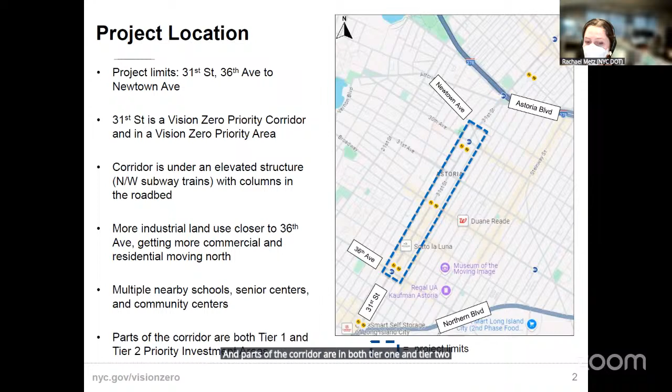So there's been a lot of work happening in this area over the last number of years that we wanted to mention. In 2017, concrete bus bulbs were added on 31st Street at 39th Avenue, 36th Avenue, and Broadway.

In early 2020, there was a public workshop about expanding the Astoria bike network and the proposed protected bike lanes on 31st Street in each direction as an option, in addition to Crescent Street, which was implemented later that year and into the following year.

In September 2023, there was a public workshop about the bike network and public realm planning for 31st Ave. And in summer and fall 2024, daylighting treatments were installed on Broadway from 21st Street to Steinway.

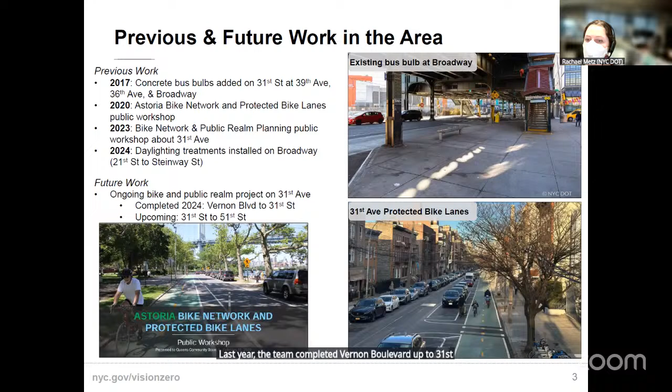In terms of future work, there's an ongoing bike and public realm project on 31st Ave with a bike boulevard and public realm improvements. You can see in the bottom right-hand photo, the protected bike lanes on 31st Ave. Last year, the team completed Vernon Boulevard up to 31st Street, and the upcoming portion is 31st Street to 51st Street.

And the Western Queens Street Safety Plan, this was a report published in springtime 2024 by multiple elected officials - Tiffany Caban, Zohran Mamdani, Jessica Gonzalez Rojas, and Kristen Gonzalez. Our safety proposal on 31st Street, along with DOT's Vision Zero work, the expansion of the bike network in Astoria, and previous transit work on the corridor, align with the 7 goals outlined in this report.

I listed them here, I'm just going to read through them. The goals are to improve bike infrastructure and design, to improve pedestrian infrastructure and design, universal daylighting, reimagine traffic enforcement, slow cars and disincentivize heavy vehicles, make the MTA excellent, reliable, and accessible, and safe and sustainable e-micromobility.

And this report also requests a north to south bike connection and identifies 31st Street as a potential corridor through the neighborhood.

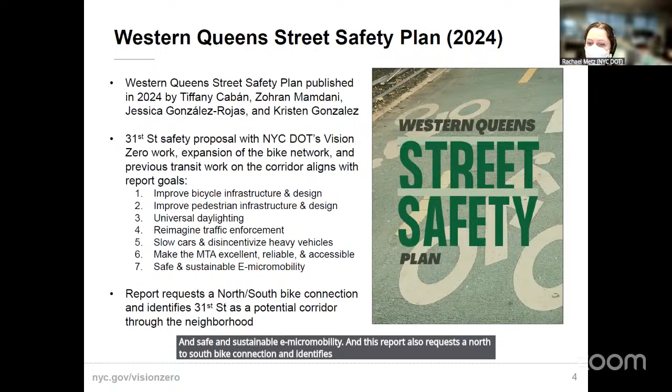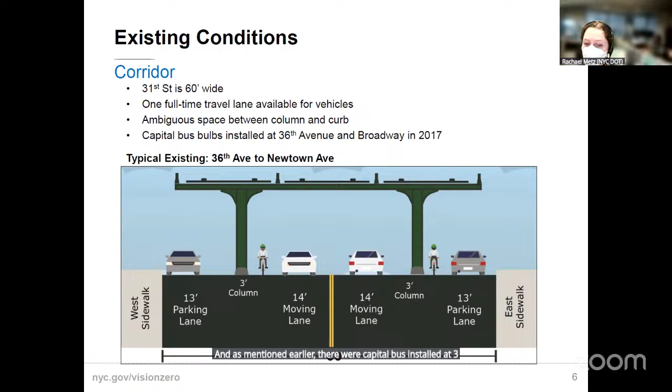So if we're looking at what 31st Street looks like now, here's a cross section of the existing conditions. It's a pretty wide street, 60 feet wide. There is one full-time travel lane in each direction available for vehicles. There's this ambiguous space between the column and the curb, which you can see on the right-hand side - the cyclist is biking next to a parked car. As mentioned earlier, there were capital bus bulbs installed at 36th Avenue and Broadway in 2017.

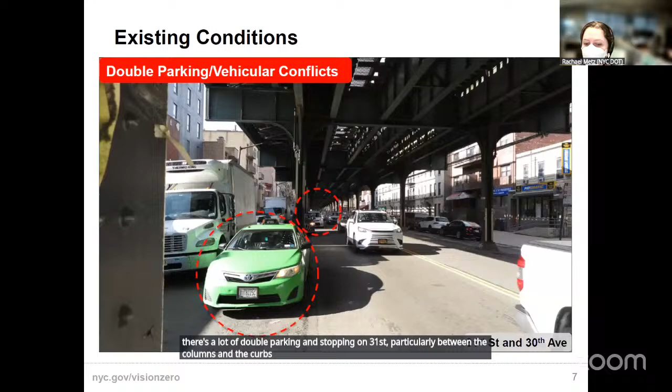This double parking can lead to unpredictable vehicle movements. When vehicles are stopping in this ambiguous space between the column and the curb, and then driving out into the travel lane, that makes it unpredictable for everyone using the road—other drivers, as well as pedestrians and cyclists.

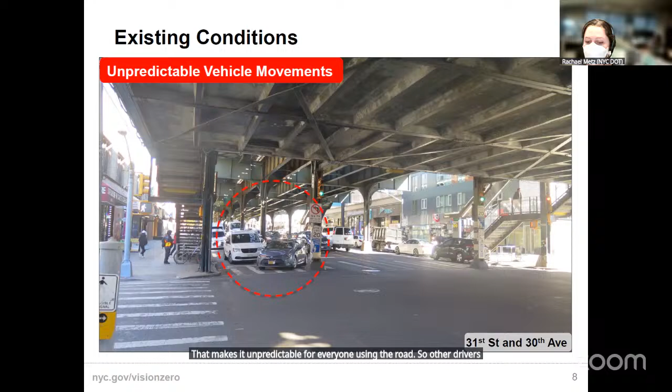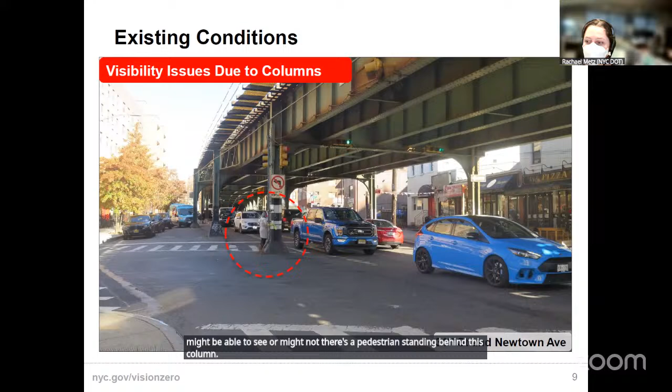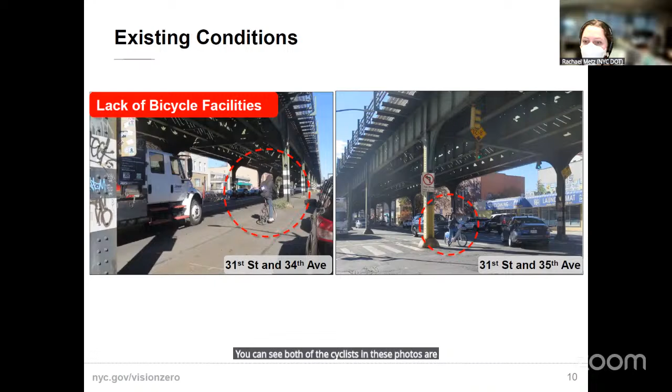And there are long pedestrian crossing distances. As mentioned, it's 60 feet wide, which is a long way to cross, but especially if you're, just like in this photo, pushing a stroller or might have limited mobility.

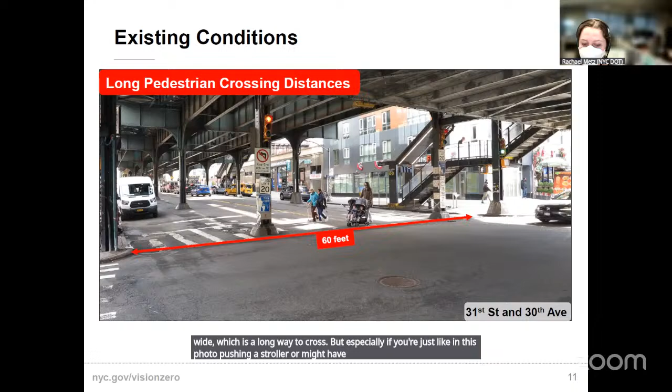The first is to move the curbside parking adjacent to the columns, kind of in line with the columns, to define this space between the columns and the curb.

Next is to install protected bike lanes on the curb in the northbound and southbound directions, as seen in the green in the bottom. Next is to install painted pedestrian refuge islands at the intersections where feasible to shorten crossing distances and improve pedestrian visibility, which we'll see on the aerials in a few slides.

Install vertical elements to encourage vehicles to make slower and safer turns and to yield to pedestrians and cyclists. And then one extra element is that we'll be resurfacing this corridor this summer before implementing the proposal.

So how does this fit into the Astoria Bike Network? This proposal will provide an important north-south bike connection to existing bike infrastructure in Astoria, with connections to 36th Ave, 34th Ave, and 31st Ave bike lanes.

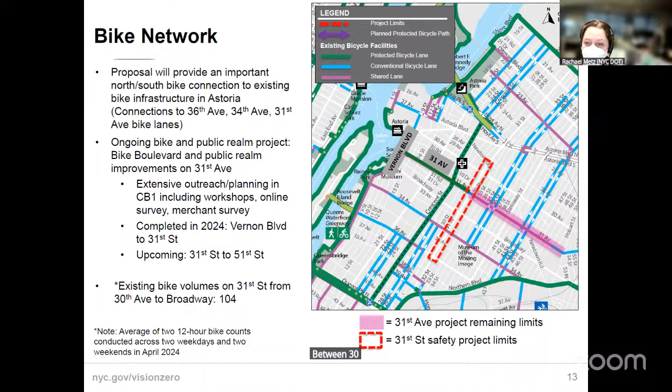We also wanted to touch on protected bike lane safety. In 2022, DOT released a report called Pedestrian Safety and Older New Yorkers, and this study analyzed the impact of protected bike lanes on safety for roadway users.

It showed that protected bike lane designs are proven to calm traffic and improve safety for all roadway users—pedestrians, cyclists, motor vehicle users. It also found that safety improvements associated with protected bike lanes are the most impactful for the most vulnerable roadway users.

If we look just at pedestrians, that's nearly an 18% overall injury reduction and nearly a 30% severe injury reduction. And if we look at just senior pedestrians, some of our most vulnerable street users, there was a 22% injury reduction and nearly a 40% severe injury reduction.

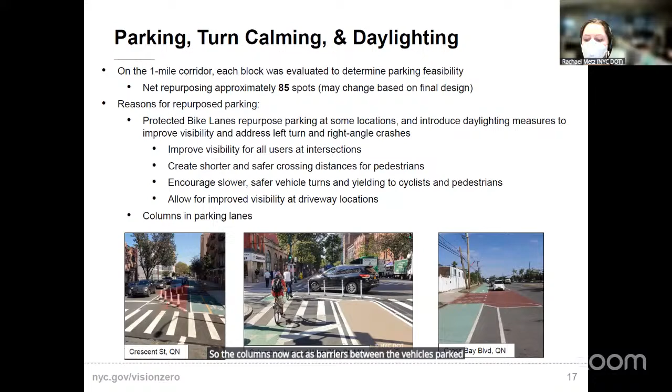Additionally, some parking is repurposed due to the location of the columns in the road. The columns currently are in this ambiguous space that we discussed, and they obviously cannot be moved. So when we add the floating parking next to the protected bike lane, vehicles are now adjacent to, in line with the columns, as opposed to between the column and the curb. The columns now act as barriers between the vehicles parked there, which causes some spots to be repurposed on each block.

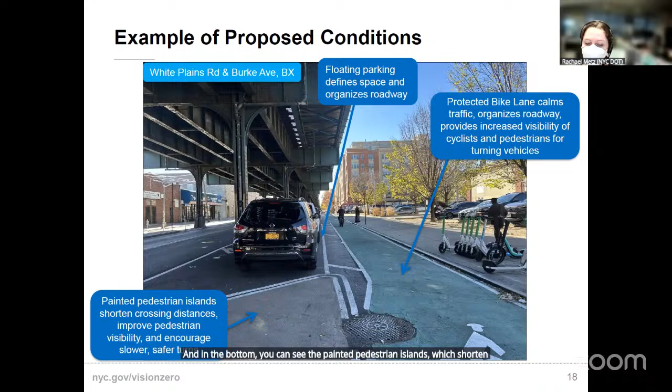Here's an example of proposed conditions on one of our projects on White Plains Road and Burke Ave in the Bronx. You can see on the right-hand side the green protected bike lane, which calms traffic, organizes the roadway, and provides increased visibility of cyclists and pedestrians for turning vehicles. Next to it, you can see the parked cars in the floating parking, which defines the space and organizes the roadway. At the bottom, you can see the painted pedestrian islands, which shorten crossing distances, improve pedestrian visibility, and encourage slower and safer turns.

Overall, these project benefits organize the roadway and clarify vehicle movements underneath the elevated subway. The proposal provides slower and safer turns, reduces conflicts, and improves visibility among drivers, cyclists, and pedestrians. It reduces speeding and vehicle conflicts on 31st Street and increases pedestrian visibility and safety. The protected bike lane calms traffic, shortens pedestrian crossing distances, and organizes the roadway, providing safety for all roadway users, and provides safer and more convenient bicycle travel, expanding the protected bike lane network in Queens.

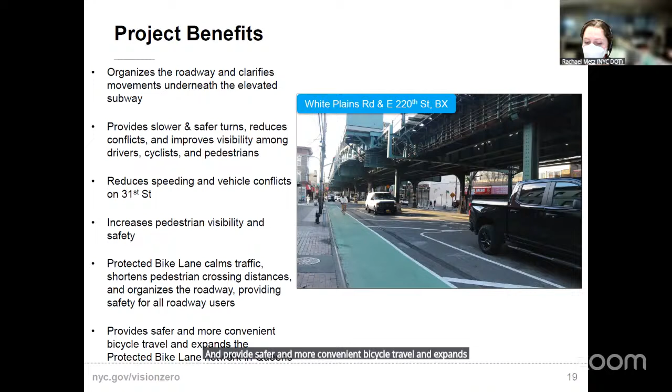Hello, this is Dominic. Put up your hand if you have questions to ask committee members.

Rachael, that is an amazing presentation, thanks so much. That's an amazing presentation, Bobby. Thank you, yeah, I second that. That was a great presentation, and also great to see the conditions in very similar places on White Plains Road. It's helpful.

I was curious if any of the bike lane stretches would be getting physical hardening or protections along the corridor, or if the entire bike lane is going to be curbside, obviously with exceptions for spots around fire department connections and things like that.

For parking protected bike lanes, we typically start off with just the painted barrier, the buffer. We don't usually put physical barriers in between the parallel parked cars and the bike lane. However, if we had issues with double parking or consistent intrusions into the bike lane, we would explore that. But we typically use the parked cars as the physical barrier between the travel lane and the cyclists. Okay, thank you.

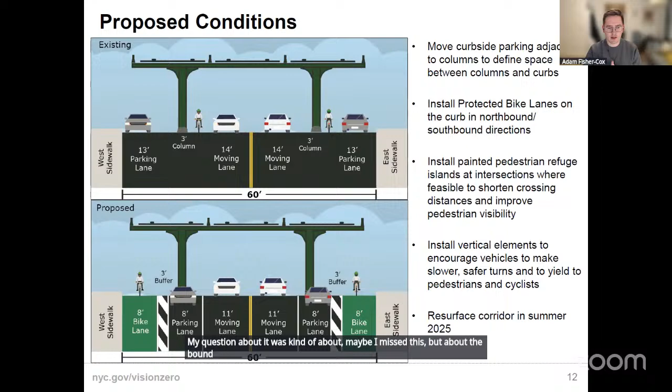Thanks. I just want to echo again, this is going to be a great change, and going to make this street so much more coherent and easy to follow where people are supposed to be. My question was about the bounds of this project. What's the thought, especially on the southern side - it feels like this would be a great route to get down toward Queens Plaza, but it seems to fall a little short of connecting there. What's the thought on where this ends, north and south?

Yeah, so our focus here is really to kind of frame 31st Ave and then 34th. We're trying to plug into the east-west first, and then look at an expanded scope beyond that in the future. We just felt like we wanted to get the heart of the activity here to lay the foundation for the north-south network.

CB1's getting a lot of resources this year from DOT. We've got 51st, we have this Northern Boulevard project, 31st Ave, 31st Street. Finite resources, so we wanted to focus on the heart of where we could get the most commercial connections east-west, biggest bang for our buck in 2025, and that's what we're focusing on. Gotcha, that makes sense.

I would say, if these bike lanes are going to end at a certain point, a weak point in general of the design of bike lanes in New York that I find is that they sometimes just end and there's not a clear idea of where to go next. So for example, if there's a painted area with an arrow indicating that the protected route is going to turn at some point, or anything like that at both ends of this - at least until hopefully it one day extends - it would be really appreciated.

Okay, it's noted, thank you. Yeah, absolutely. And my other comment was going to be that these painted parking areas and pedestrian islands probably will be used as parking areas if they're not hardened in some way.

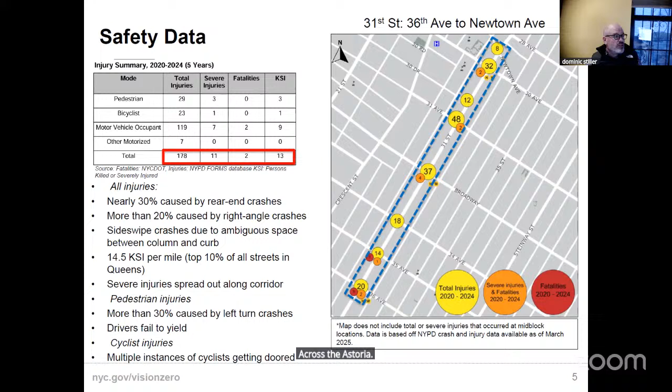Thanks, yeah, I think the update is great. I feel like I've been waiting 30 years for it. It's way better organized now per the plans.

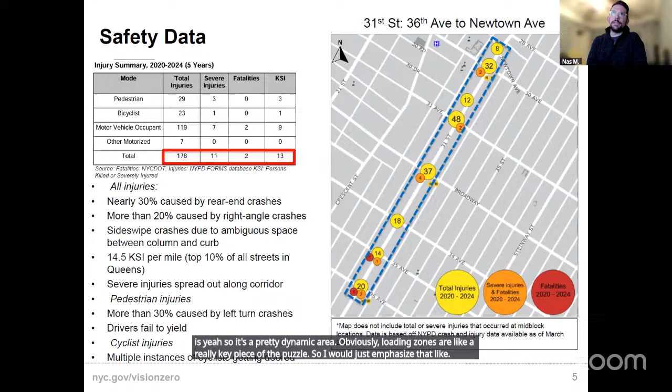Just to add on to Hugh's point, and similar to Elizabeth's point in the chat, it's a pretty dynamic area. Obviously, loading zones are a really key piece of the puzzle. Realistically, there's going to be a ton of commercial drop-offs, which are usually the most disruptive double parking situations, because 53-foot trailers should not be in the city and probably not on this route, and they rarely can get in between the columns, let alone currently curbside, they almost always can't make it.

Just as an example, Euro Markets on 31st Street gets tons of deliveries daily. Those are definitely areas where you'd want to look at having, at least during business hours, commercial only parking. Overnight it can be public parking, otherwise those spaces are just going to become public parking all day, and you don't solve the problem with commercial loading, which is a big issue.

Similarly, realistically a lot of pickups are happening at all the subway stops. I kind of wish this was going all the way north to the Ditmars area, because that area is a super chaotic passenger pickup zone for similar reasons as the rest of the strip. I think the parking unit is really key for this project because of how dynamic the use is, and there's a lot of need for very short-term parking, whether for commercial loading or passenger pickup reasons.

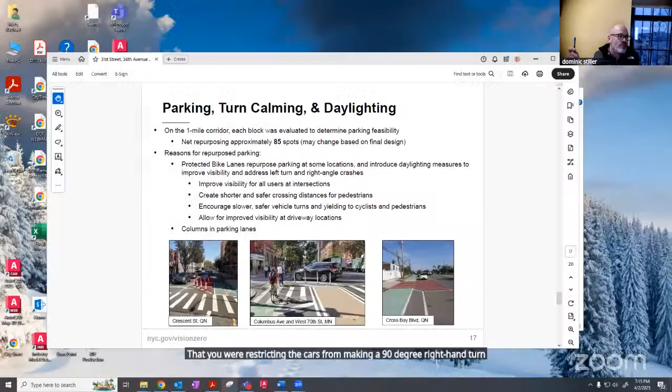I understand, but I want to see how, because what happens a lot is there's painted space, and right-hand turning cars decide which side of the column to go to. From your earlier drawing, which I'd like you to put back up, I thought you were restricting cars from making a 90-degree right hand turn off of 31st in both directions, but maybe you're not. It'll be painted space.

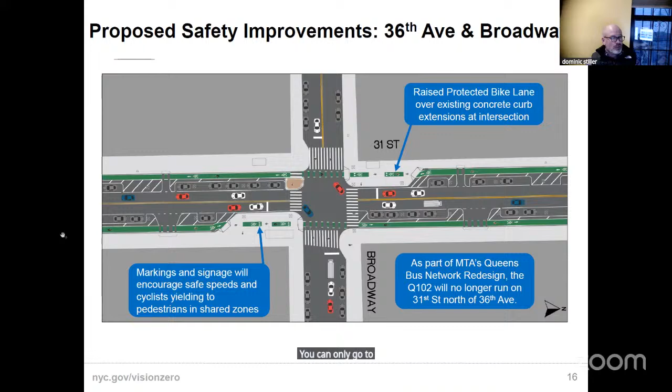So that's the right turn there, north or south off of 31st. In other words, you're on 31st and coming off of it, you can only go to the left of the columns. Yeah, but that's existing concrete. Can you show the other one?

Oh, that's great, there you go. So here you have painted space, painted. Yeah. But it's a shame that you don't have a curb extension to make the right-hand turning cars in both directions have to keep the column on their right.

Those painted spaces could be upgraded to concrete in the future. But what we find, pessimistically, is a poor installation makes a good design bad. Do you know what I mean? People will be running over it, so why wouldn't you consider just concreting that?

When I saw the other layout, I assumed you had new concrete, but now you're saying you've got absolutely no new concrete in the whole design, Chris? Not this year. That's a real shame.

Dominic, I think it's important to remember we always do try to come back to existing painted spaces and try to build them out. That's what we're going to attempt to do this quarter, and what we're doing on Queens Boulevard.

Just south of where this project is, we've already built some new bus boarding islands. I believe it's at 37th Avenue, built last year. Also a little inside baseball on that: we're working with the MTA when we do concrete near MTA facilities, such as the columns, like that island we built at 37th for the bus stop under the El last year.

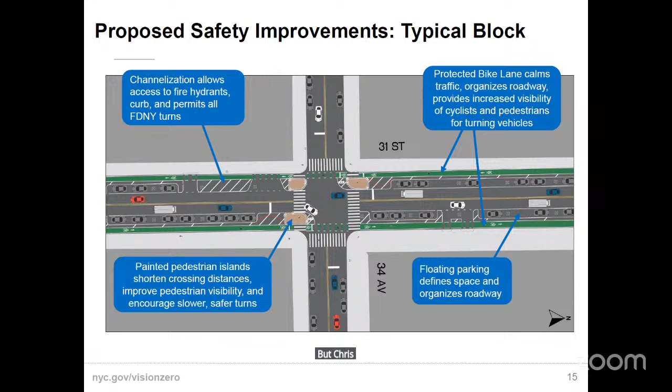But Chris, sorry, I didn't mean to - no, that's all, jump right in. So we're planning to implement this summer. As we had mentioned before, we're planning a resurfacing of this portion of the corridor in conjunction with the project, and that's not eligible until the new fiscal year. So this project can't start until after July.

The resurfacing on 31st Street would be nighttime work, and that allows the work to happen more efficiently. But it takes a few weeks to do a resurfacing, and then after that we usually expect markings of this kind of scope, for about a mile, to take about two months to get completely done. So there's multiple stages of that: the white lines, the green paint, the pedestrian space, the brown paint in the painted spaces, and then the vertical elements of the plastic delineators.

What was the other question? Oh, just the whole design, the whole plan. So the snippets that we show here, we take an AutoCAD drawing - that's a digital drafting software - and we make them pretty for the presentations, and that's pretty time consuming. So we don't do that for the whole design. We take typical intersections such as 34th and 31st here, and then the other ones that have the bus bulbs.

And that's going to be the template for the whole corridor. But the parking loss, the parking repurposing that we present in the plan - that's a very detailed analysis on our end, and we try to be very accurate with that.

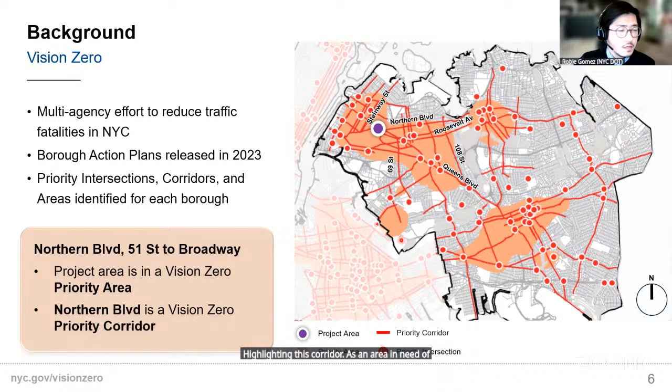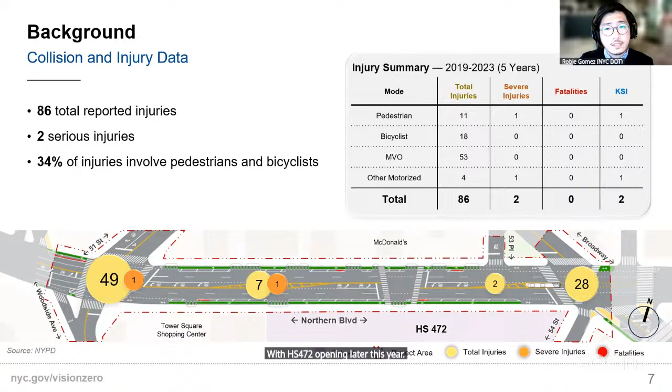In this stretch of Northern Boulevard, there have been a total of 86 reported injuries from 2019 to 2023, including 2 serious injuries. 34% of those injuries involve pedestrians and bicyclists, people who are most vulnerable in traffic. With HS 472 opening later this year, we expect to see more activity in the area, making safety improvements even more relevant.

Now that we've looked at the safety data, let's take a closer look at what the street actually looks like today and what conditions are contributing to these patterns.

This segment of Northern Boulevard is a two-way 70-foot wide street with 2 travel lanes and bike lanes in both directions. Northern Boulevard has numerous curb cuts or driveways along the north curb, which create potential conflict points between pedestrians, cyclists, and turning vehicles.

The existing painted flush median, intended to accommodate left turn bays, creates a wide open field on the roadway. This design unintentionally encourages higher vehicle speeds and gives drivers a false sense of extra space, which can compromise safety.

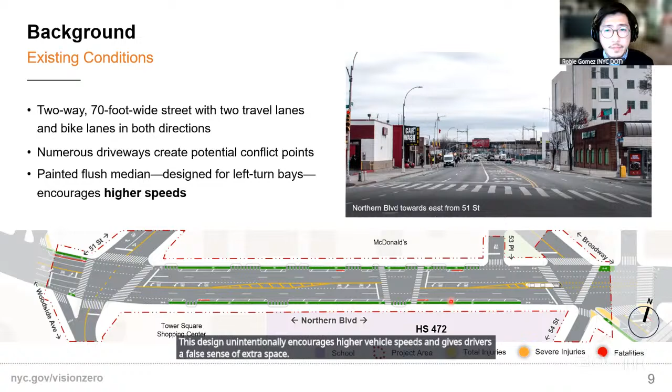Uncontrolled left turns across multiple lanes create safety risks, especially when drivers turning into busy driveways have to cross several lanes, which increases the chances of conflicts with people walking or biking. In these situations, drivers are usually focused on finding a gap in traffic, not looking for people walking along or crossing the sidewalk. That shift in attention increases the likelihood of near misses or crashes involving pedestrians and cyclists.

With more pedestrian activity expected in the area, it's important to address these types of turning movements to support a safer walking environment.

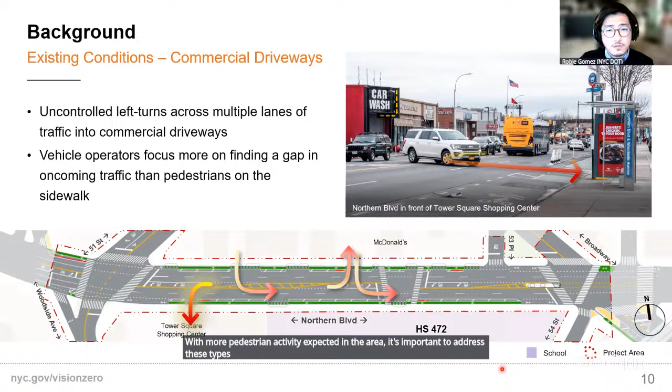It's not just where left turns happen, but how they happen that creates added risk. When drivers make a left turn, they often build up speed over a longer distance, sometimes 30 feet or more, before crossing the sidewalk. This makes it harder for them to stop in time if someone is walking or biking across, which is especially concerning near schools where students may be crossing throughout the day, not just during arrival and dismissal. Right turns, on the other hand, are usually made at slower speeds with a tighter turning radius, giving drivers better visibility of people walking or biking and more time to yield.

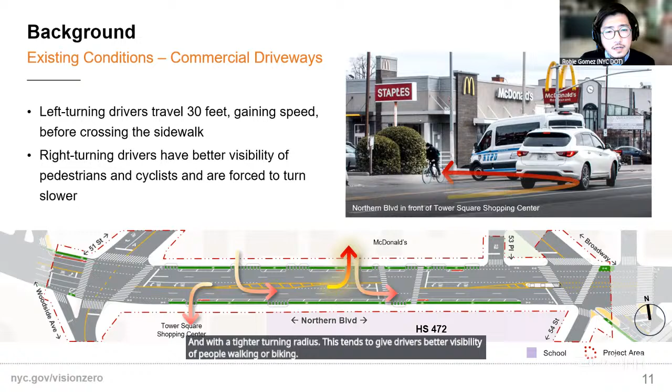While turning behavior is one part of the safety picture, the design of the crossings themselves plays an equally important role, especially for people walking. Crosswalks along the corridor are quite long, ranging from 70 feet to 88 feet. That's a long distance to get across, especially for older adults, children, or anyone who may need more time to cross.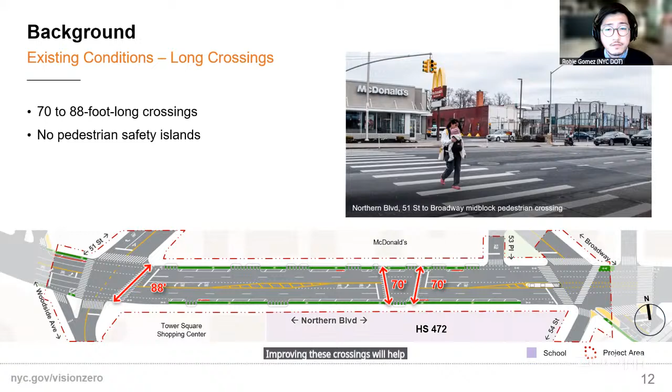Currently, there are no pedestrian islands in place at these points of Northern Boulevard. That means people have to cross the full width of the street all at once, even as traffic continues to move around them. As activity along the corridor continues to grow, especially with the addition of the nearby high school, improving these crossings will help make the street more comfortable and safer for everyone walking through the area.

Let's talk about how we're redesigning this section of Northern Boulevard to address these issues. Starting with the median and crossing improvements, we're replacing the painted median and left turn bay with a raised concrete median and pedestrian refuge island. This gives people a safer place to pause while crossing the street and makes the road feel more organized.

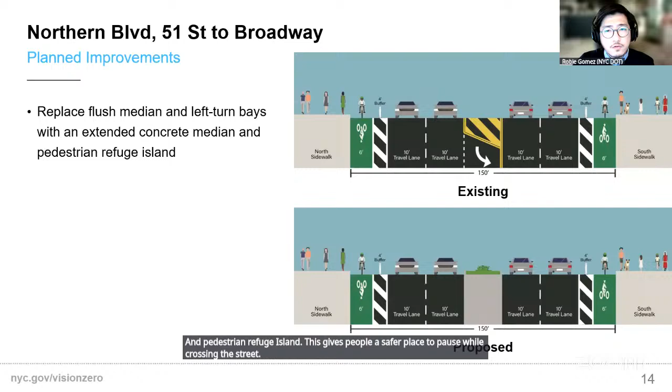There are several key tangible benefits to adding a continuous concrete median along this block. It helps shorten crossing distances, making crossings easier and more comfortable, especially for students, families, and older adults. By removing mid-block left turns and U-turns, we can reduce sudden, unpredictable vehicle turns across multiple lanes of traffic that can lead to crashes. And with a new concrete median, the street feels narrower, which naturally encourages drivers to slow down, something that benefits everyone, especially in a school environment.

We're also banning the low volume westbound left turn from Northern Boulevard to Woodside Avenue. This lets us make room for the concrete median and pedestrian refuge island, improving overall safety at the intersection.

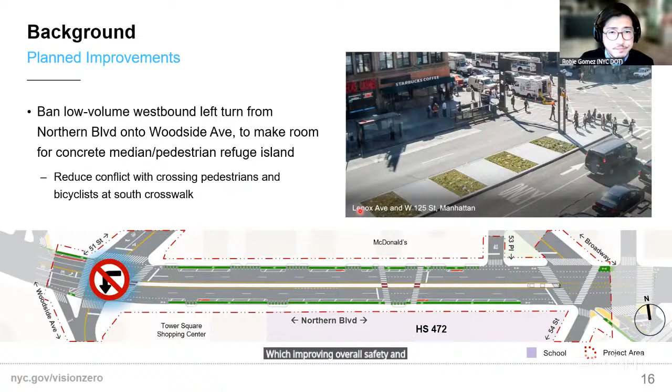With these planned changes, let's talk through alternative routes from Northern Boulevard onto Woodside Avenue. The most direct option for westbound drivers is a soft right onto Broadway, then a left turn on 51st, and straight onto Woodside Avenue. For drivers who miss that turn, they can loop back via Newtown Road, right on Broadway, right on 51st, and straight to reach Woodside Avenue.

At peak hour, only 40 vehicles make the westbound left onto Woodside Avenue, so this is a low volume movement. We've conducted a rigorous traffic analysis on these intersections, and we're confident these changes will not create any significant traffic impact.

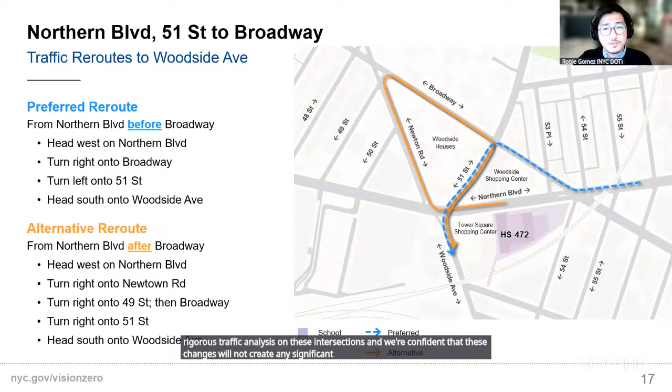This slide shows how traffic will be rerouted to access the driveways along Northern Boulevard across from the school. Most drivers will turn left onto 51st Street and loop back via Broadway to return to Northern Boulevard. Some businesses can also be accessed through an alternate driveway along Broadway. Another option is a soft right turn onto Broadway, then looping back via 55th Street and onto Northern Boulevard. Only about 50 vehicles are expected to follow this rerouting during the busiest hour.

We'll also adjust the signal timing to provide more green time for the protected eastbound left turn from Northern Boulevard onto 51st Street, supporting these rerouted movements.

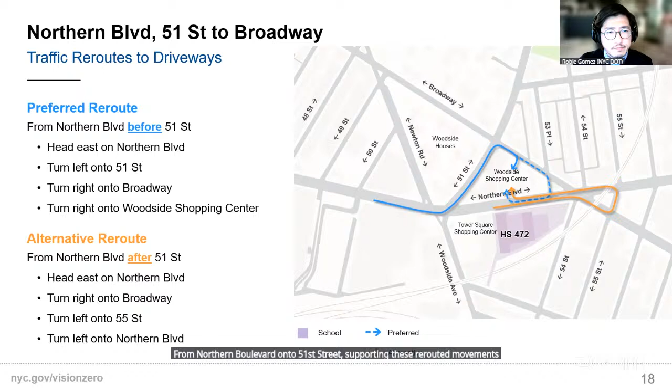Together, these changes are part of a larger effort to create a safer, more predictable street, one that works better for everyone, whether you're walking, biking, taking the bus, or driving, especially with the high school opening and ongoing transit use. We're currently finalizing the design and are scheduled to present the project to CB2 on Monday, with implementation planned for the summer.

Thank you, and now it's open for questions if you have any.

Thanks, Robie. Adam, please.

Yeah, thanks for the presentation. Northern Boulevard is definitely intimidating as a pedestrian, and with the school there, it's very important that it's safer. Could we go back to the slide that has the aerial view of the whole project? Of course.

So recently a different department at DOT came to show us the bike lane project on 51st Street, and a comment I brought up there was that there will be a bike lane coming down southbound on 51st. People may want to make that left turn to go westbound on Northern Boulevard, and this is going to be a very long journey across the intersection, with no clear place to wait and make that second crossing.

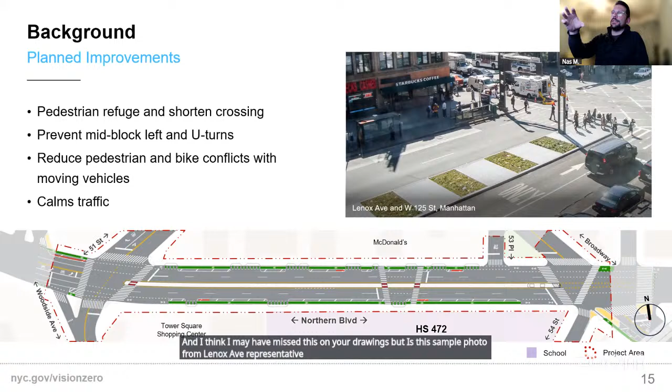Yeah, the concrete island is great, obviously very needed. I'm sure McDonald's is going to be very happy with the new high school. I think I may have missed this on your drawings, but is this sample photo from Lenox Ave representative of the width of what this one's going to be? Just because it's going to be throngs of students coming out at the same times, in terms of packing as many people as possible onto it while being safe. I know sometimes these concrete islands are super narrow, maybe only 4 or 5 feet deep, but a bigger island is obviously going to be very conducive to the sheer number of kids letting out of the school at any given time.

So it's going to be 9 to 10 feet wide. Lenox is, I think, around 11 to 12, if I'm not mistaken. But yeah, roughly almost the same width.

Okay, thanks, I think that looks good. It's a great idea because northern, especially there, it's super chaotic even with the turn bays, which are technically an improvement, but I think the island is great and a perfect use case for it.

Daniela, please. Hi, I think the left turn on 51st Street, I'd make that turn to go to Best Buy, so I like that turn. But anyway, I think it's great that you guys are looking at the safety for children.

But are you anticipating the traffic that the parents are going to be making in that area? Like when they block the bike lanes, and all the parents dropping off their kids in the morning, picking up their kids in the afternoon. Are you anticipating a lot of traffic in that area?

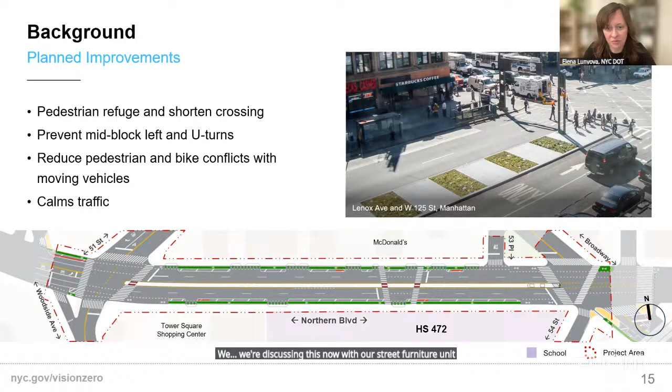We're discussing this now with our street furniture unit, and we will follow up with them. DOT has definitely been installing a lot of bike parking specifically next to high schools, and we do see an increase in biking with teenagers. We've been receiving requests from high schools, and we have been installing there.

I believe the school also provided a lot of bike racks right in front of the school. Not sure if it's too visible here, but you can see these blocks with metals sticking out—I think they're already installed there. Yeah, we see it. That's amazing, a reminder, right?

Those bike racks came at the request of the community, right? The community has been asking—CB2 especially—for all school facilities to come with this, and SCA has been doing a good job making sure they put them in. But if we need more, of course we'll put more in.

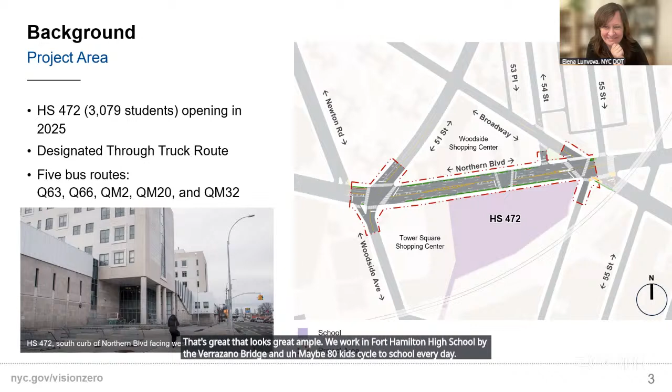That looks ample. We work at Fort Hamilton High School by the Verrazano Bridge, and maybe 80 kids cycle to school every day. It's great, it's incredible, and they have the infrastructure for parking there. I know it's not Astoria, but it will still help—it'll eliminate a few school buses and reduce traffic also.

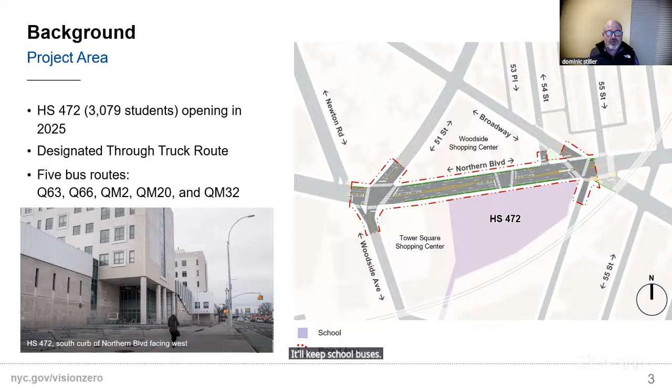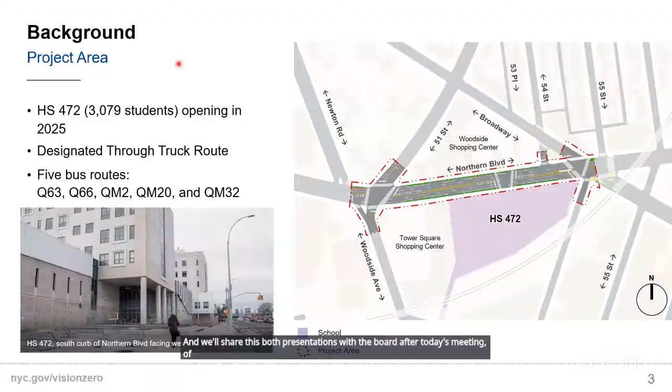Okay, great, thank you so much Elena, Robbie, and Jason for that presentation. We'll share both presentations with the board after today's meeting, and we're always open to additional conversations if needed. We'll follow up on some of the questions we have here—we've taken some notes, and Joe and I will follow up after debriefing with Robbie, Elena, Chris, and Rachel's team from RIS on the 31st Street project.